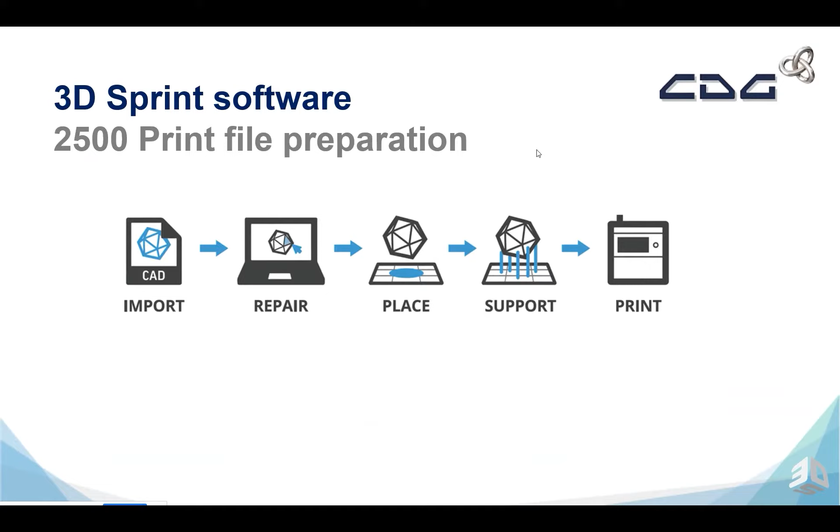The software we use to slice our models is called 3D Sprint. It's an exclusive software by 3D Systems for all of their plastic printers. It's a really powerful software which allows us to do a number of different processes with our parts. We can import our native STEP or IGES files, our native CAD, convert that to a mesh body, apply repair tools to fix geometric problems, place it into a build envelope, auto-place and orientate our parts for maximum efficiency, create support structures, and send to the printer.

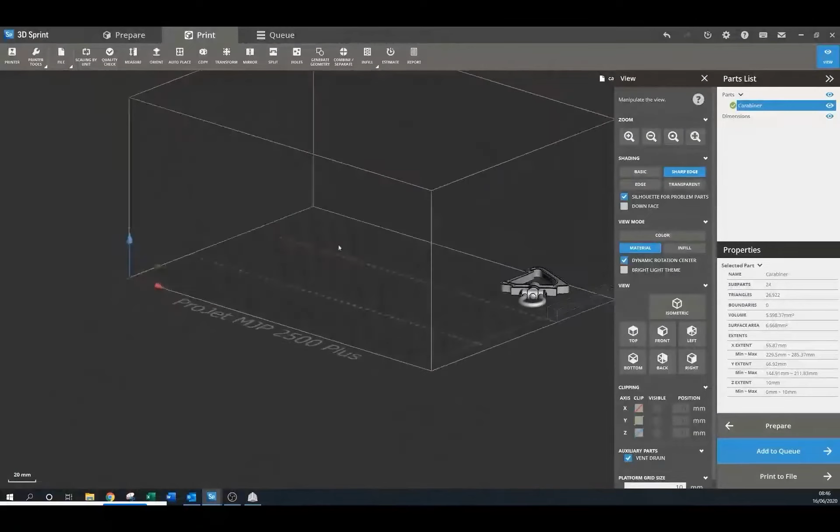So a quick introduction into the workflow. We have a part here, part geometry that we're going to look at. We're going to add this to the printer. You can now see the print envelope of the 2500 here. It's a small carabiner part that we're looking at, maximizing the efficiency of this build.

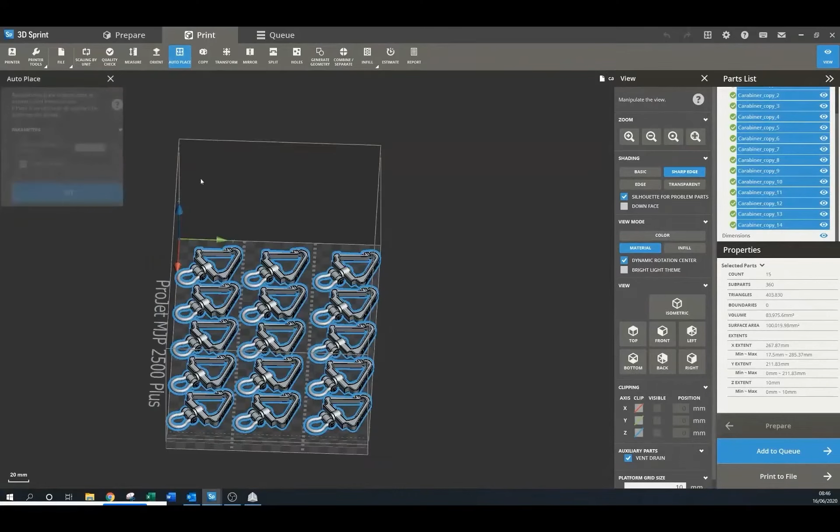So what we're going to do is actually create a fill of the build automatically using the fill pattern tool, which allows us to copy the part and fill the build envelope. We can obviously stack in X and Y, but also Z, which is really nice.

You can see here that we have 3 channels that we work with within the 2500. Each one of the channels is shown by the dotted line here. We can see that basically filling the channels up is how the printer is working. It actually has a head which is only about 8 centimeters long, but we have 3 lots of 8 centimeters that we're running along with the print head.

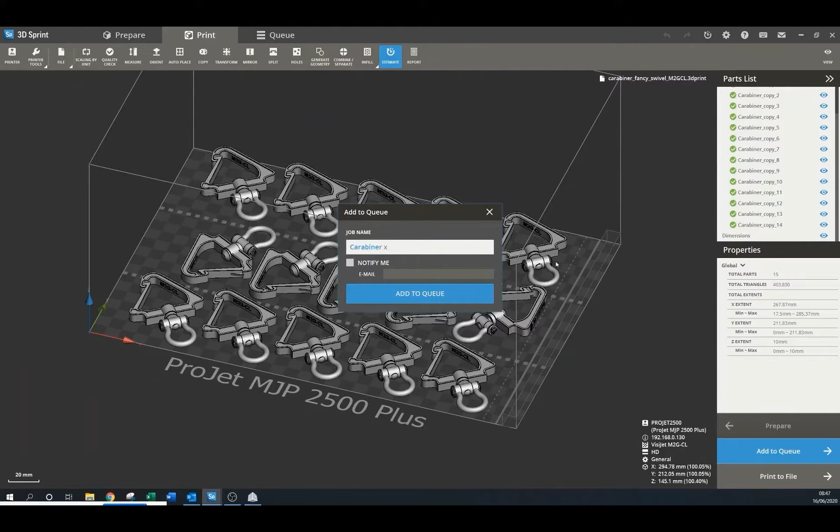So I'm just adding this now to the queue for the printer. I'm just going to add this now. So just seeing it sending to the printer now. So this is a very basic introduction.

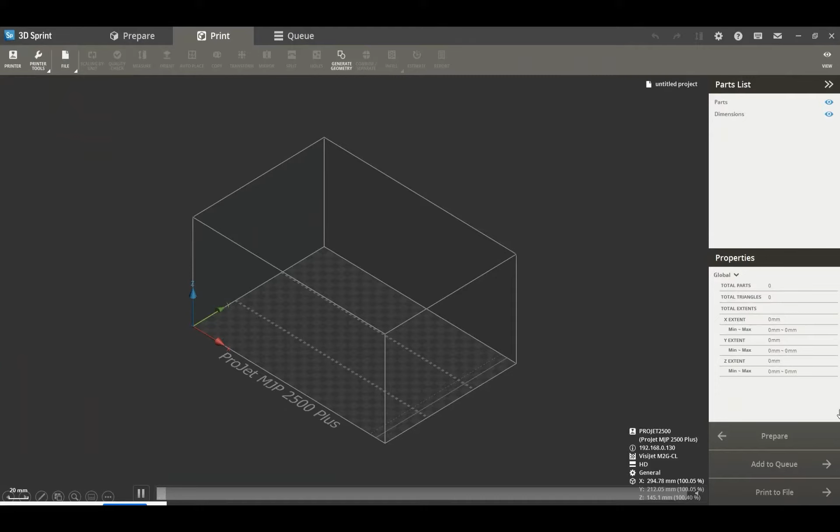I'm just going to move on to something a little bit more complex, which allows us to see some of the more interesting features that the Sprint software enables us for. So again, I'm just importing a part here. It's a jig fixture for a mold.

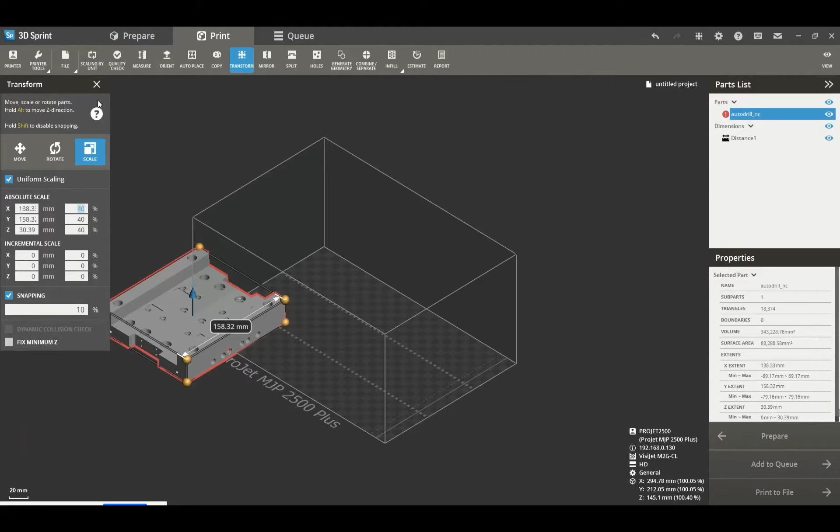We're just going to do some simple measurement tools here, so I can see the measurement of a part using the measurement tools. I can transform the geometry using the transform tools, so I can scale, rotate, move very simply and easily. You can see that the measurement is updated with that scaling as well, which is really nice.

We can do auto placement, which allows us to auto place our part for maximum efficiency of building. I'm just going to hide the distance there. So this way I can then move on to something a little bit interesting about the 2500, which is the ability to create lattice structures within our geometry.

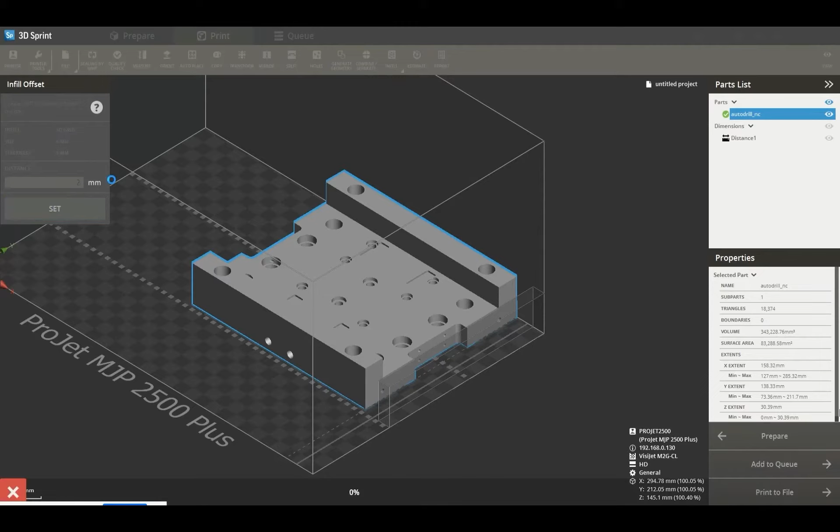So the lattice structure works by creating a shelled object. Right now I'm creating a 2mm shell of the object, which means that now I've got 2 kinds of structures in the build. You can see on the part list here that I've got the first bit and then the internal volume which has been created.

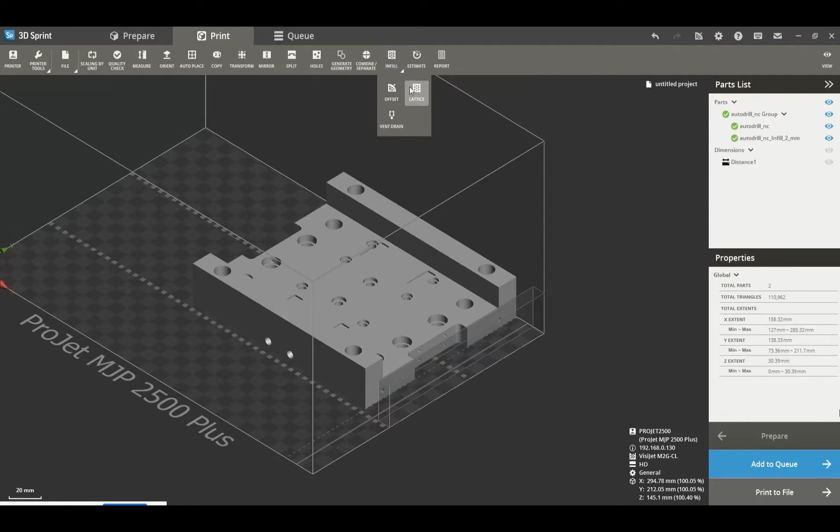So now once I've got the internal volume, I can actually create a lattice structure within there. By creating the lattice, I can create different styles of lattice, and you can see how it's highlighting the internal core in a red color. There's a number of different lattice structures we can create, such as jack, star, or a 3D grid.

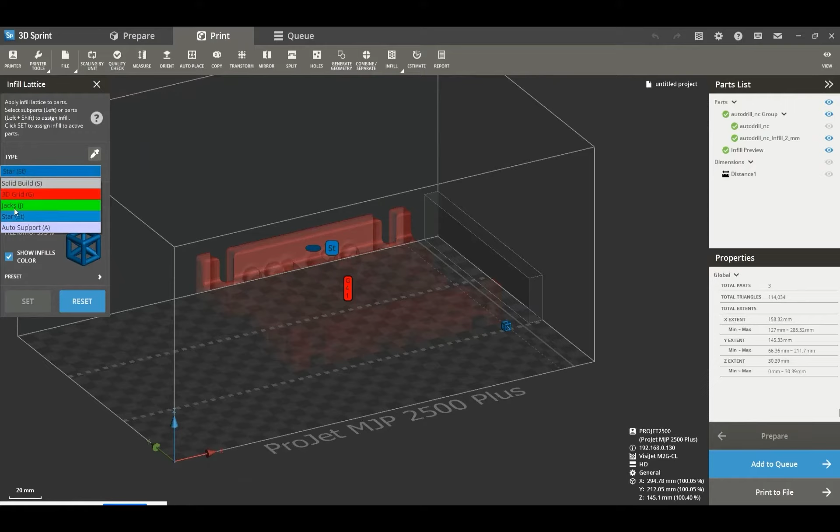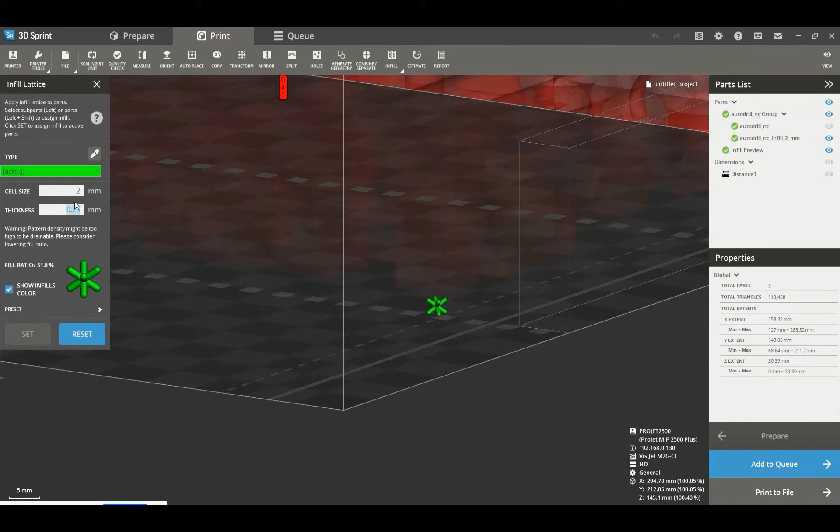Or I can create it as a solid or as an auto support, just creating it as a wax support structure. I can see the lattice structure being generated in the bottom corner, but it's only procedurally generated. All the lattice generation is done on the machine, which is quite nice. So this is only telling the printer what we want for the lattice to be made.

We can see here that I can manipulate the cell size and thickness of the elements so that I can change the fill ratio of the part, which actually improves the cost of this part without reducing the strength of it, which is really nice.

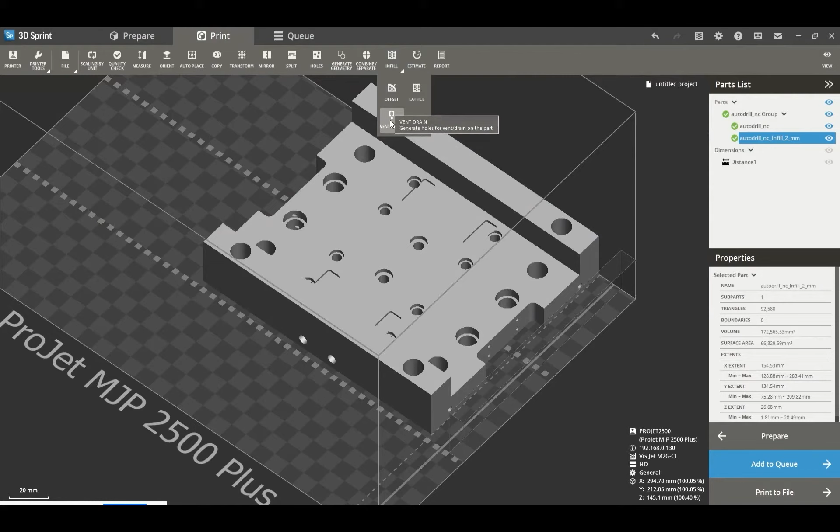So I can just do a quick now adding some vent drains. I could leave the wax inside the part, or I could remove it using these vent drains. It's a really nice tool for adding small holes in the part which connects the internal volume to the outside. By simply clicking on the part, I can add vent drains throughout where the wax can come out from the internal structure.

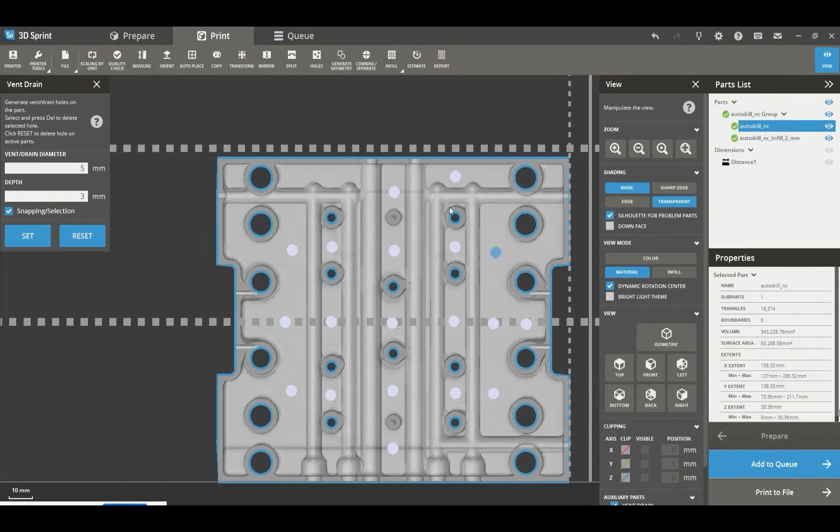So how this mechanism works is it has the part material being created as well as a wax support structure. The wax support is actually generated everywhere it can possibly be generated, in that we are creating like a 2D shadow effect on our part. In this way, we have perfect generation of our parts through the print, and we can just melt that support wax off after the build, which we'll come on to in a short while.

Just creating an estimate here of the use of material and the print time, so 6 hours, 28 minutes. I can see the estimated use of material and wax supports.

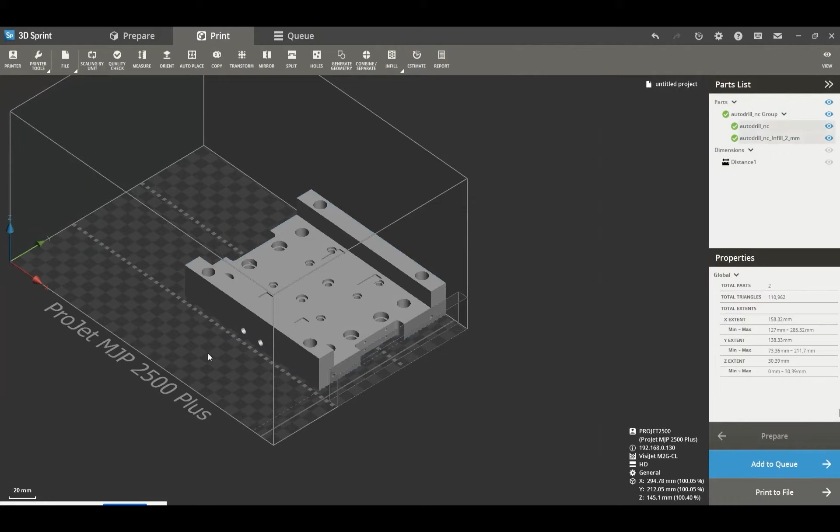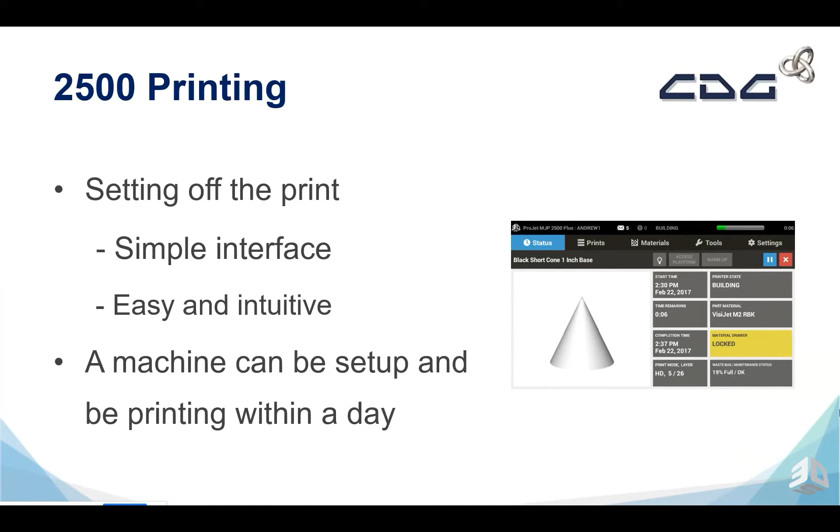Okay, so the 2500 is really easy to set off. Simple interface, easy, intuitive. So even through the 3D Sprint, we send down to the printer, which then we have the small LCD screen, which we set the print off from. The machine is really easy to set up and can be printing within the same day of delivery.

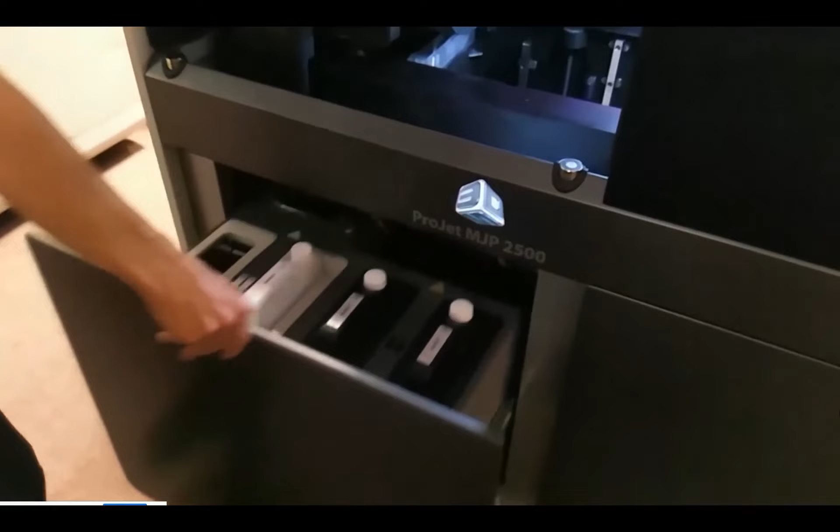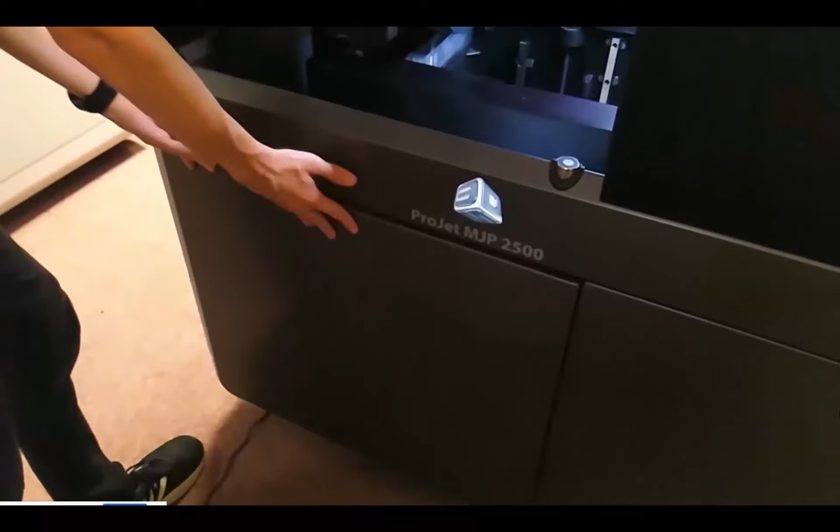So this is adding the material into the printer. We have a 2-slot system so that we can add material throughout the print, so we can continue printing even if we're low on materials. In that way, we never run out of material during the print. Simply setting off the print is a click of a button and it's ready to go.

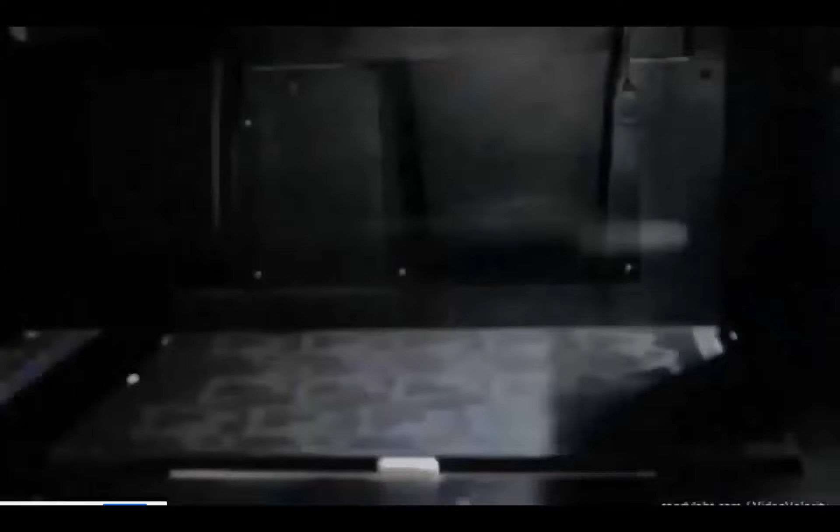So in the print, we can see the part being laid down and the head moving back and forth, quite a fast-paced process, so it's been sped up quite a bit. It's moving the head back and forward in the XY position, and then that bed is dropping down in the Z, allowing us to layer on top of the parts.

So you can see this was a 4-hour print, a very, very quick process of creating these parts.

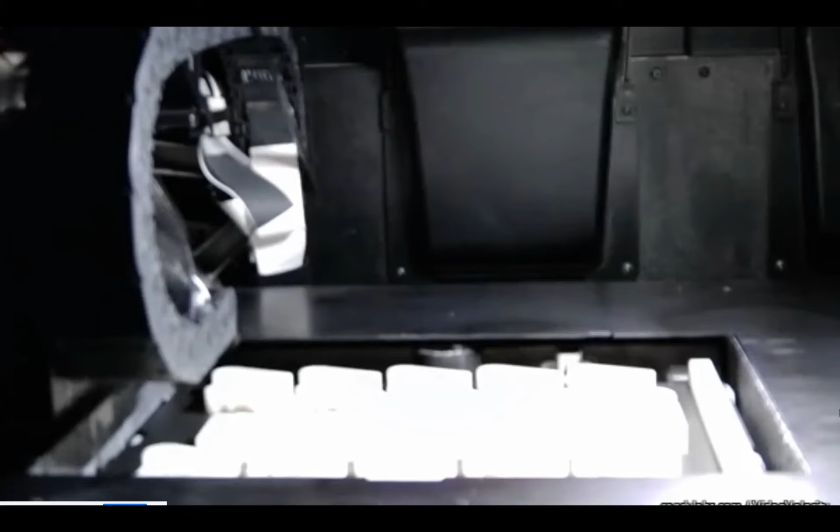So once we have the print finished, the print bed actually comes out of the build as well, attached with the wax onto the build. This way we can actually just swap out a build plate and continue printing, which is really nice for throughput on this machine. Once we have the build plate off, how do we get the parts off?

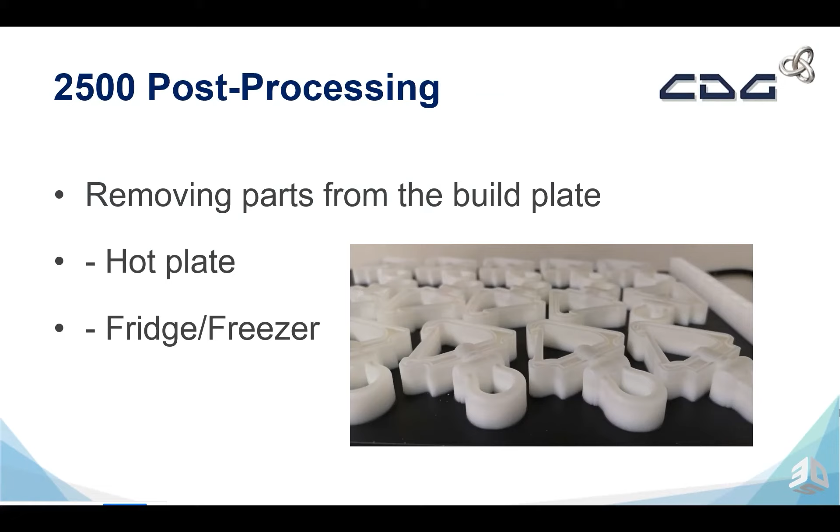There is a hot plate or a fridge method of doing this. A hot plate will heat the bed, which is a steel structure, and melt the wax so that they can be pulled off. A fridge freezer will contract the wax and actually just pop it off from the build plate. So both methods are really effective for taking the parts off of the build.

Once we have the parts off the build, we now have to remove the support wax.

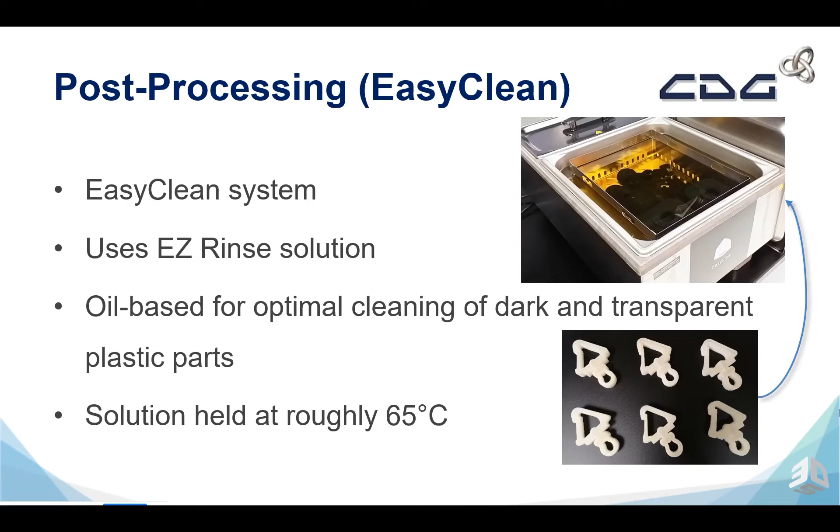Now, the go-to method of removing the support wax is the EasyClean method, which is a steam bath tool with a steam bath and an oil bath, so there's 2 components. The steam bath removes the bulk of the wax, and then we move to the oil bath, which uses the EZ Rinse solution, a cornstarch oil-based fluid which removes the surface wax from the parts. The solution is held at 65 degrees C to remove all of the surface wax.

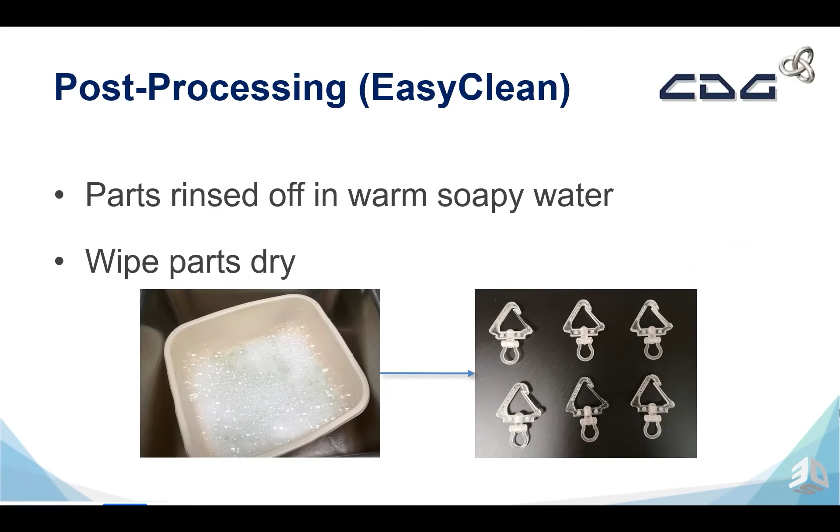Once the parts have been cleaned in EasyClean, we need to then remove the oil from the parts, which we use simple warm soapy water and wipe the parts. We get really nice results with this. The carabiner is the part we're showing off here. Using this methodology, we get the full carabiner movement, and it's really nice because of all the assembled parts there, which is really good.

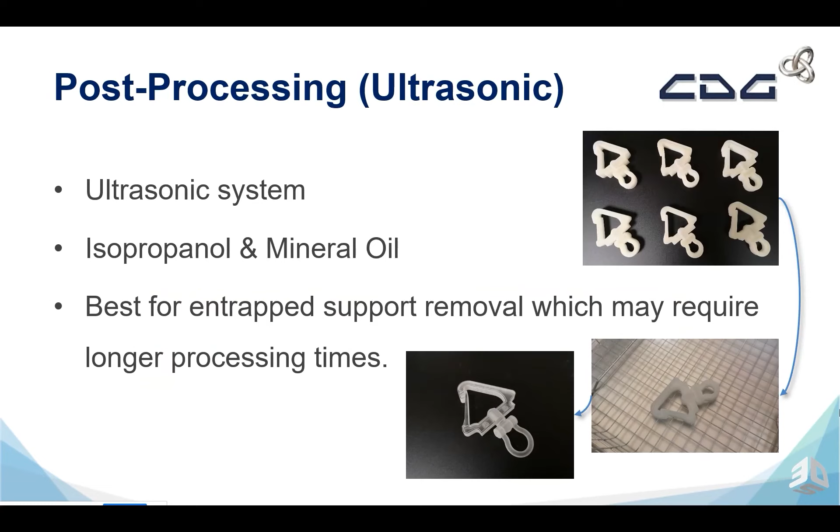Another method to remove the support wax is using an ultrasonic tank. An ultrasonic tank, again, is a one-step cleaning process, which is quite nice. We can drop our parts into the ultrasonic and it will remove all of the wax, even the surface wax. We use isopropanol and a mineral oil as a mix in the solution to remove all of the support wax. It also removes all of the entrapped support wax as the ultrasonic movements get into the final hard to reach areas.

The other method is using an oven. This is good for batch processing, so we can put lots of parts into an oven, melt all the wax off, and then take them out and wipe off the surface wax. This is really good for bulk removal of support wax. So for big parts that have lots of wax, an oven is a really good solution.

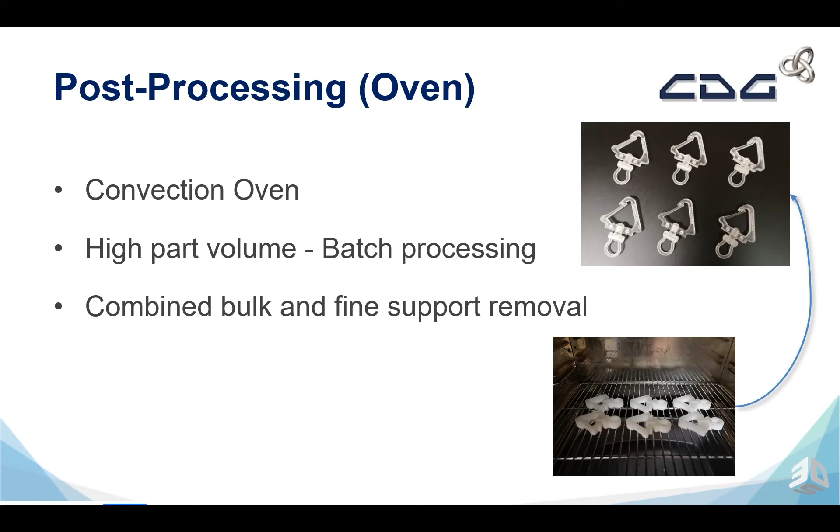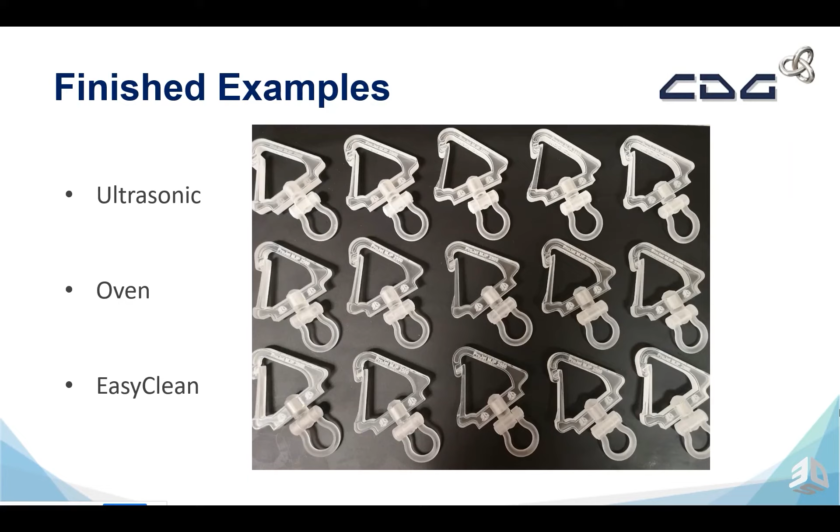Just having a look at some of the examples here, we can see the differences between the ultrasonic, oven, and EasyClean. They all look very similar in finish, as they all do a very similar job.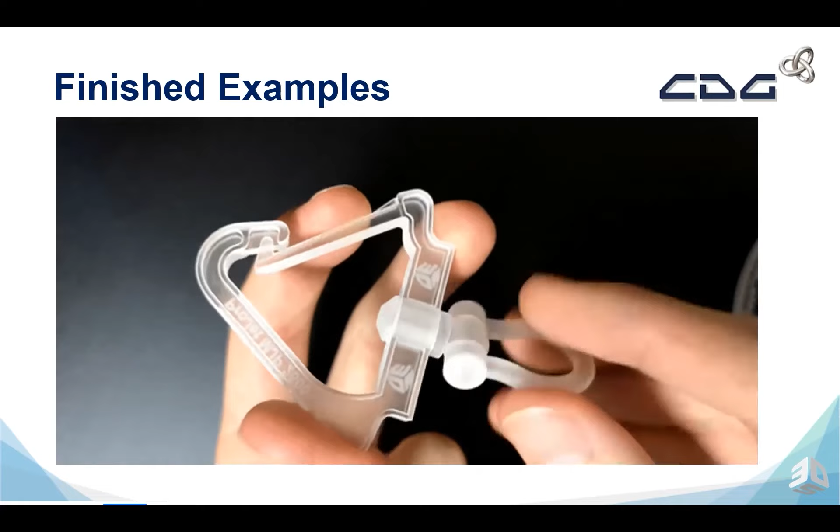So this is the part that you'll be getting sent to you. This is an example of an assembly part. It's got a moving element, it's got a flexing part. It's a really cool part to show off this detail and also capabilities. It's also got entrapped wax. You can see the 3D Systems logo and the ProJet 2500 label there, which shows that you can actually have entrapped stuff for labeling and whatnot.

Just to have a quick look at some of the stats for printing off this carabiner clip: a quantity of 1, so printing it 1 on the 2500 in the M2G-CL material takes approximately 1 hour 55 minutes. Material cost is £6.76, and the time per part is 1 hour 55 minutes. So this is a very quick print, nevertheless, but we can start to improve by increasing the quantity to reduce the time per part.

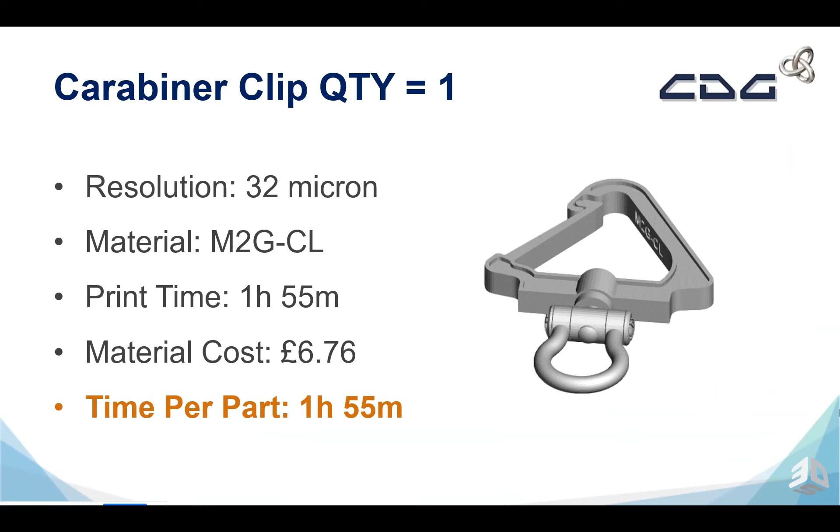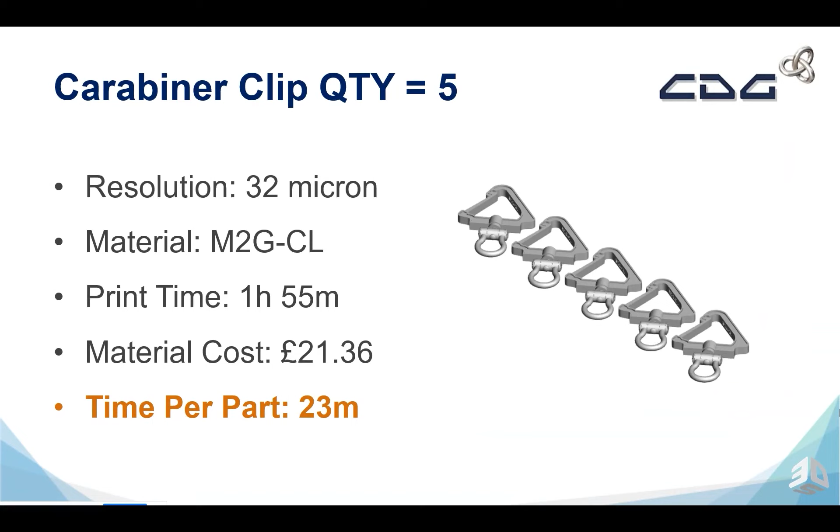So if we look at doing a set of 5 parts, again same material, print time is still 1 hour 55 minutes because of the channel system on the 2500, where we're able to fit the whole channel full of parts and still continue with the same time. The material cost is £21.36, so reducing cost per part, and the time per part is 23 minutes. The reduction in time is massive.

So let's fill the build up in the XY. We can see the print time is now 4 hours 23 minutes because we're using the 3 channels. The material cost is £60.10, but now the time per part is 17 minutes. So we've reduced the time per part massively again.